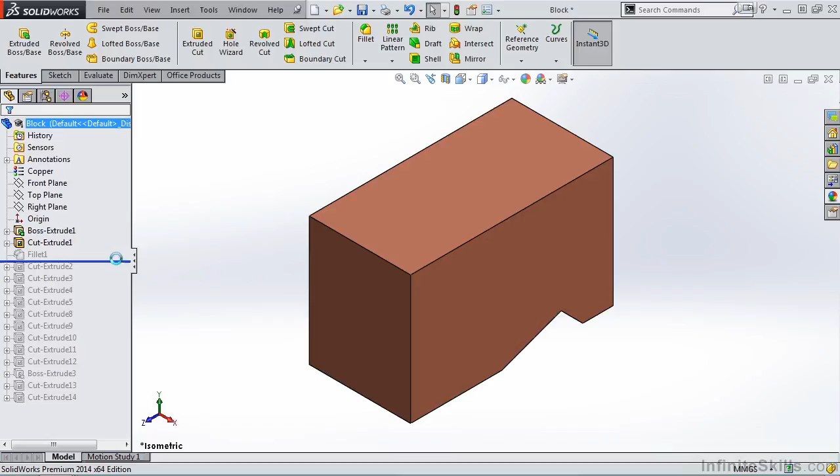Before we edit any existing sketches or features, let's take the rollback bar and roll it back to the very beginning of the Feature Manager design tree, just to see how the model was constructed. It appears we have a simple rectangular block, and as we take the rollback bar and roll it down the tree, you will see the part slowly evolves into the finished part.

Now, after the part is created, let's assume we want to change the angle of this bottom cutout, which is currently at 20 degrees, to 25 degrees. There are some different options for this, but the easiest method will be to edit this existing sketch.

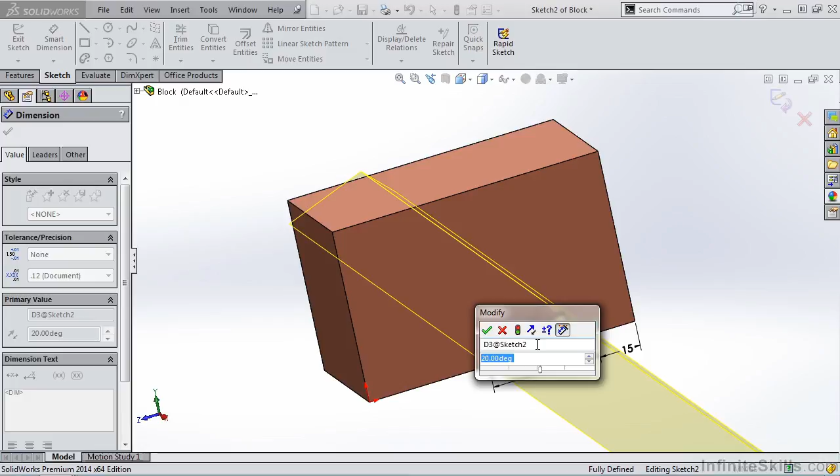I'm going to go to the Feature Manager design tree, and moving my cursor down the tree, notice when I'm above Cut Extrude 1, that feature highlights. So I'll expand that feature, select Sketch 2, and then Edit Sketch. I can go back out to the graphics area, double click on 20 degrees, and change it to 25. I'll close out of the sketch, and editing an existing sketch is as easy as that.

Now let's take a look at how to edit an existing feature. In fact, let's edit the depth of this cutout. I'm going to go back to the Feature Manager design tree, locate the feature, edit the feature, and notice my depth is set to 9. I'm going to change it to 10.

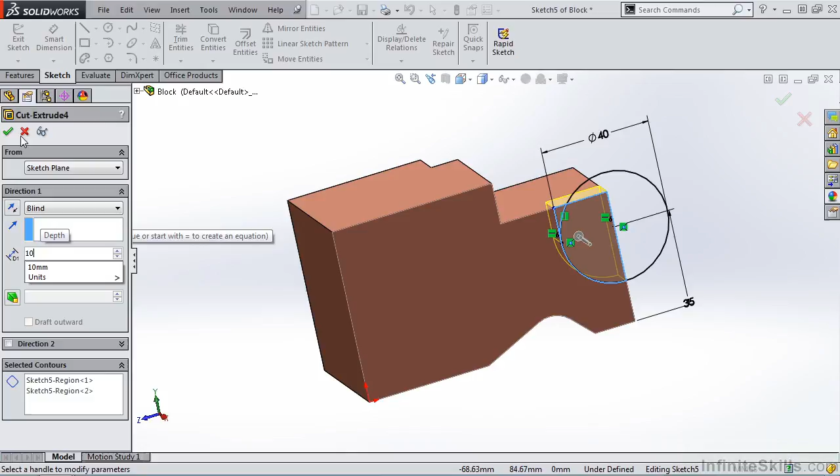Now that may not seem very efficient to go back and forth between the Feature Manager design tree and the graphics area. SolidWorks does allow you to select the feature on the screen.

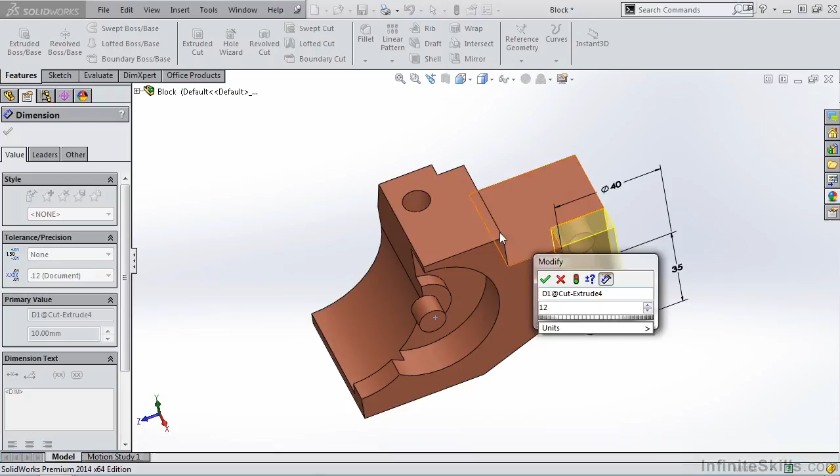Notice the different color dimensions. We have black dimensions and blue dimensions. Black dimensions represent sketch dimensions, and blue dimensions represent feature dimensions. You can change either of these on the screen, whether sketch dimensions or feature dimensions. So if I double click the 10, I can change it to 12. Or if I want to change the sketch, notice I can change it on the screen.

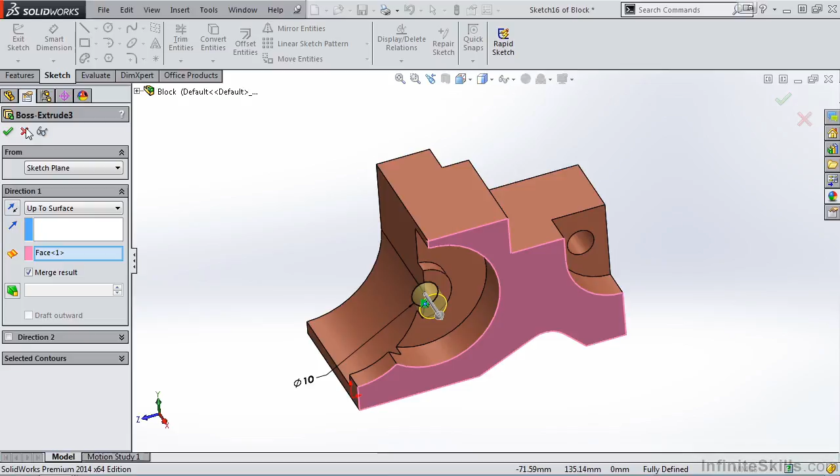Now, not everything can be changed in the graphics area. For example, on this feature, if we edit it, the length of that pin was based on Up To Surface, which is this face here. So in order to change the length of that pin, we would be required to go back to the Property Manager. So that gives you a few ways to edit existing parts.